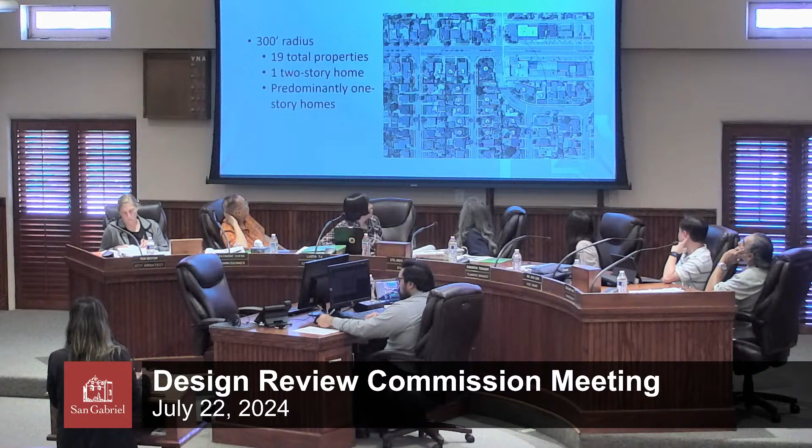The San Gabriel Municipal Code requires a comparison of one-story versus two-story homes within a 300-foot radius of the project site. There are a total of 19 properties within this radius, and there's only one two-story structure in the neighborhood, so the proposed one-story project is deemed compatible with the predominantly one-story streetscape.

The general plan land use designation for the site is low-density residential, which allows for single-family residential use in the R1 zone, so the proposed project would meet housing goal 10.3 of the general plan.

The project was reviewed for compliance with the California Environmental Quality Act, CEQA. The proposed project is exempt per guideline 15303, which is a class 3 exemption for new construction.

The public notice for the project was provided in several ways. One, it was mailed to all property owners and tenants within a 300-foot radius. The notice was posted at the project site, City Hall, the post office, and the public library, and it was also advertised in the San Gabriel Sun newspaper on July 11th, 2024.

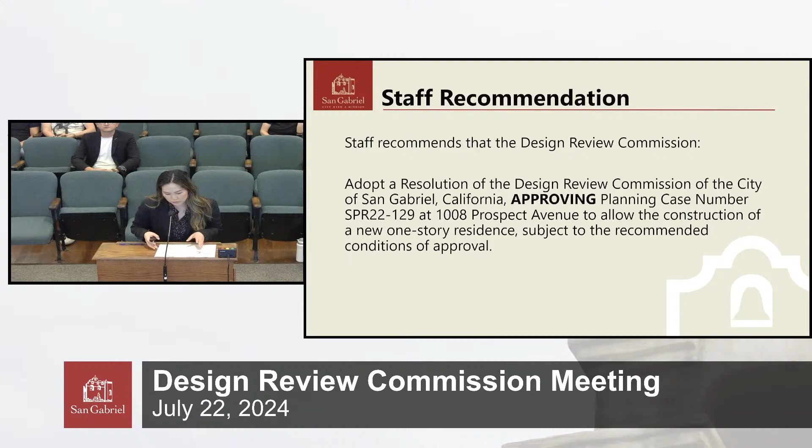Staff recommends that the commission adopt a resolution approving planning case number SPR 22-129 at 1008 Prospect Avenue to allow the construction of a new one-story residence, subject to the recommended conditions of approval. That concludes staff's presentation, and I'm available for questions.

Thank you. We'll go down the list here. Commissioner Tsang, do you have any questions for staff? No, I do not. Commissioner Tu? No, I don't have questions for staff. Thank you. Commissioner Lopez? Not at this moment, thank you. Vice Chair Salo? No questions for staff.

I do have one question. This property has two fronts, one on Prospect, which the address is on, and the other is on Circle Drive, which is the rear of the property. In the list of conditions for approval, number 55 calls for the planting of one tree. Parkway Landscaping says one tree to be planted on a public street, as per the city's master plan. So would that be the Prospect, or would that be Circle Drive?

I'm sorry, Madam Chair, which condition number is that? Number 55, Parkway Landscaping. That appears to be a condition from the Public Works Department. I believe that would be along Circle Drive, from my understanding. Okay, all right. Because I was looking on their landscape plans, and it wasn't specific on that. Right, it wasn't shown on the landscape plan, it was implemented as a condition of approval, so they'll need to show that on the plan checks that's needed. All right, thank you.

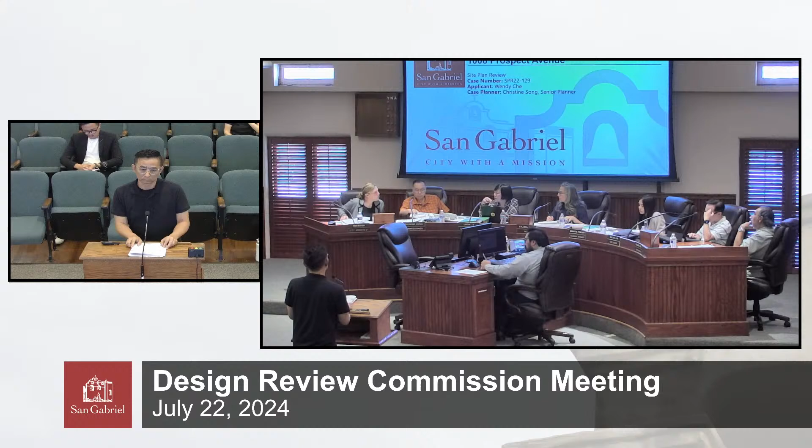Understood. Also, the material board showing the exterior door, that is a charcoal color, but the image showing is like an oak wood color. Is that a typo? I'm sorry, I'm Wendy Che, by the way.

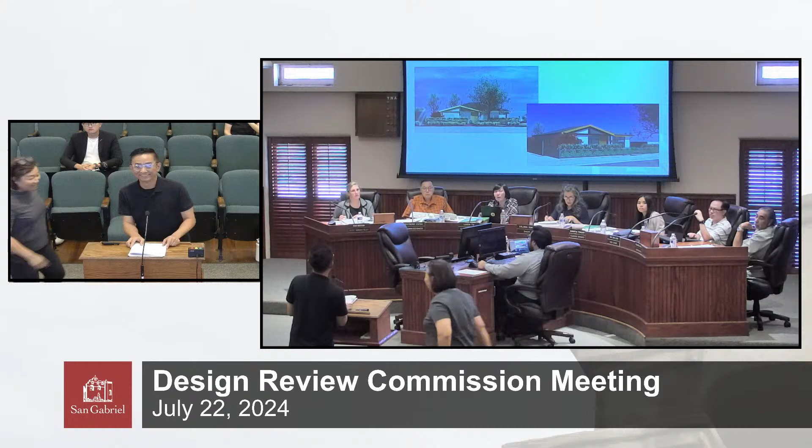Basically, originally we wanted to design with black vinyl, but we weren't sure, so we did it white. But we drove around San Gabriel City, and there's a lot of black windows, so we're proposing to use a black vinyl, manufactured by Milgard. Oh yes, I know that.

I was asking about the exterior door. The door that we indicate, the style of the door - we just downloaded the picture from the website, and it indicates the wood color, but we want to stay with dark charcoal, dark espresso color. Style-wise, everything's very consistent, consisting of a brown color, black window trims, and black window frame. I'm sorry, brown window frame and brown doors. Everything will be in that consistent color.

So it is a charcoal color door, dark gray, charcoal color door, right? Yes. And this one is showing like two doors, right? One side light, one single, paired. One small side light, one 36-inch single door.

Okay, so the elevation is showing the right thing, but the material board is not. The board, I think the color that you see is actually dragged from the computer. We did not change the color because that's something readily available on the computer.

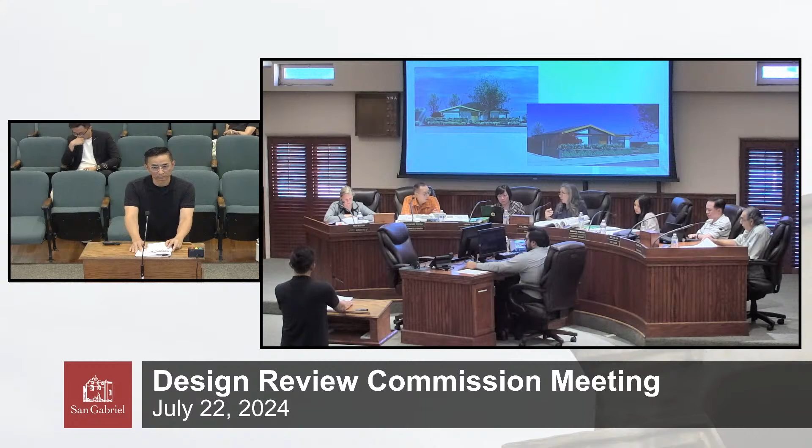They give guidance. I'm going to turn to Julia - she's not our normal contact, she's our substitute today. But this is something that one commissioner has brought up: the applicant said this was the best they could do after working 2 years with the city architect. Is there confidence that the city architect team can fix everything, or is it best just coming back at this time?

So our typical city architect hasn't seen that board, right? They've seen this paper submittal, which appears to be a bit more consistent, minus the vinyl windows which say white rather than black - that probably came late in the game. However, as someone who does design review on lots and lots of plans, if your comfort level as the commission is to see this again and want to see the final product, it's not so much about whether sending it back to the city architect means he can fix it, because he absolutely can. I think it's more about your comfort level in approving something and knowing what you're approving versus being a little confused at how the exterior might end up.

So I'm not one for continuances, no one likes those. But if it is a matter of getting this into a consistent form, because this is what we all see at the end of the day when we drive by this home, and it is going to be very visible, and it does have the front and back, and it really is quite nice looking. It's got some very great design features, and it's progressive, but has definitely some style to it, that I do think the details are vital.

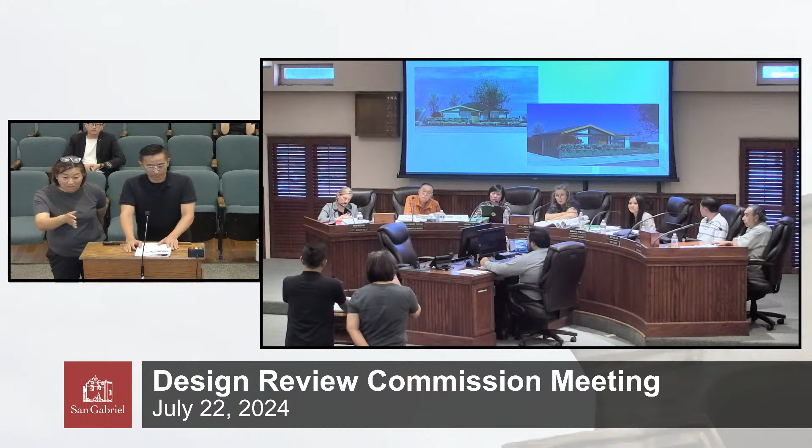So today, believe it or not, I was surprised too, because when they did the design board, I remember we had to use a black window. How did they change to white window? We don't know. We're the first one, so I don't know if it was required by the city or if this had to be done.

So tonight, we thought we were prepared, but of course this is kind of confusing, because the owner gave me a couple of guidelines she wished to keep for the design. But this is a little different than her wish list in the beginning, because we went through numerous changes. So if you give us a guideline, we would like to get back next month, because this house she's building for her 80-year-old mom.

At this point, 2 years went by and this house is not even built. We are still in the public hearing. So at this point, I think we have a pretty clear understanding after today's meeting. We're going to make the design elements, the rendering picture, the design board, everything consistent. So next time when we come back, we will be prepared, and there will be no confusion, because the chocolate was one of the colors, but I don't know if it was allowed or not allowed. So tonight looks kind of confusing.

That's because I'm seeing it for the first time myself, because we were so busy with other projects. The window has to stay black, just like the rendering shows, so it's not according to the design board. After tonight's meeting, we have a pretty clear understanding of what we need to do, and next time when we come back, everything will be consistent.

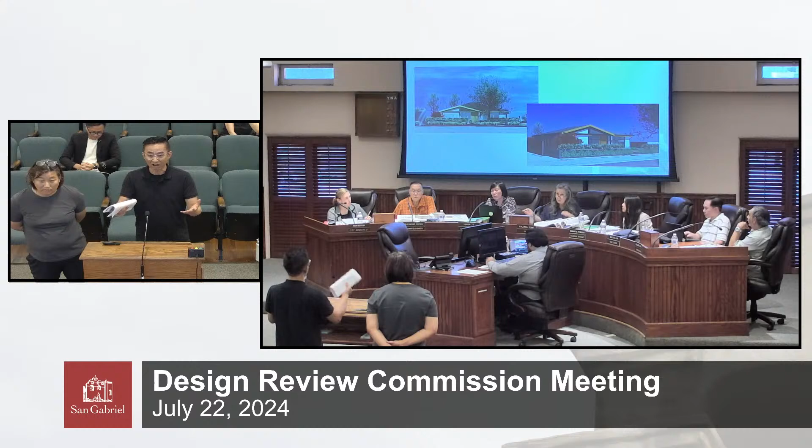So I think there's also the actual material sample here. This fascia board, is that correct? I'm sorry, the fascia board is my confusion. The fascia board and then the beam have to be solid wood. That material is gonna use under the, I don't know what that is. I think it's important that we're not going to tell you how to design your building. I think you really need to talk to the people who are going to be building it, together with your architect, and work all those out, because if they're not consistent on material, size, and color, it will not work at the end.

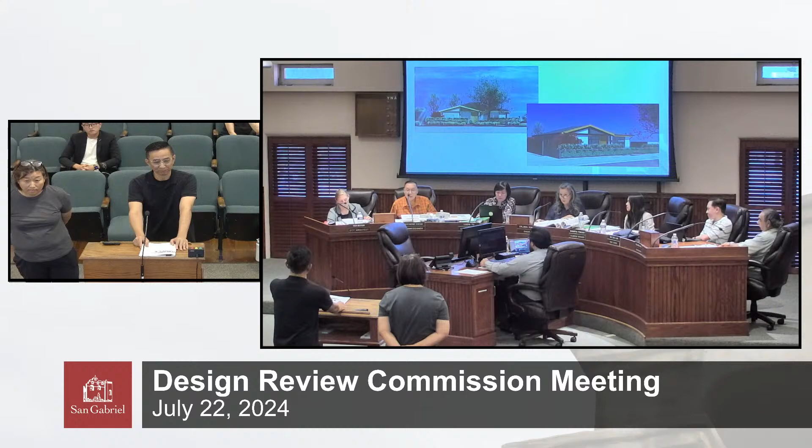Yep, understood. I don't want to repeat what was already said. I think you understand what the inconsistency is, and it makes it almost impossible for us to second guess what you want. Yeah, I got your point, it's not fair to the planning staff.

So I think there's enough discussion on our second motion, if staff would ask for clarification on the motion and the second, the timing of the continuance. That would be date uncertain, wouldn't it? Yeah, the timing of the continuance is open-ended. If the client can somehow come back next month, then that's fine. Date uncertain, so there's no time set, in order to give them the best opportunity to be successful. So it's up to you - you can do it sooner or you can take your time. But if you want to get this thing quickly, get with the city architect quickly, work everything out, and I think we may be able to see it next month.

Okay, thank you. Okay, we do need a roll call on the motion.

Commissioner Chang, yes. Commissioner Tu, yes. Chair Romo, yes. Vice Chair Say Lo, yes. Commissioner Lopez, yes. Okay, motion passes, 5 ayes. Continued, date uncertain.

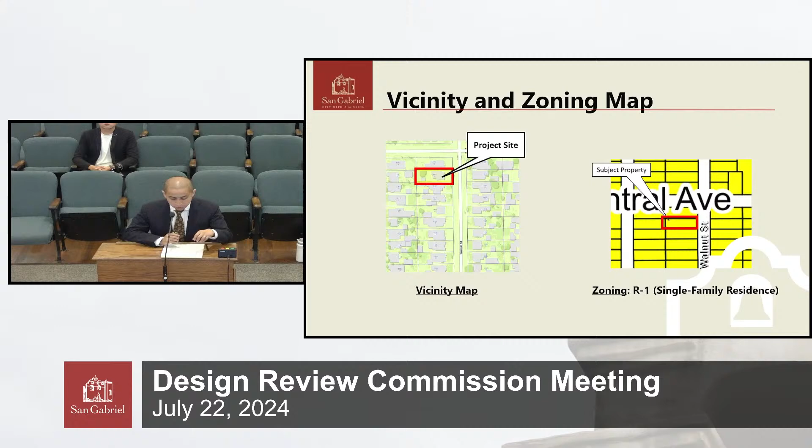The property measures 7,557 square feet and is currently developed with a 1,494 square foot single-family, single-story home. The property is located on the west side of Walnut Street between East Central Avenue to the north and East Chestnut Avenue to the south. The property is zoned R1 for single-family residences and has single-family homes directly to the north, south, west, and east.

The project before you tonight is for a new two-story single-family home and a 658 square foot detached garage and workshop area. The single-family home will measure a total of 2,617 square feet with an 1,805 square foot ground floor and 812 square foot second floor. The proposed home is consistent with the development standards set forth in the municipal code for the R1 zone, including building height, second-story setbacks, lot coverage, and floor area ratio.

The architectural design of the home was reviewed by city staff and the city architect for consistency with the design guidelines for single-family residences. The proposed home is designed in a contemporary style and will be clad in a variety of materials, including white Omega stucco in a smooth finish, horizontal James Hardie siding in a pearl gray color, and an Eldorado Stone veneer.

The project proposes to install new landscaping on the project site. The front yard will include a new lawn and a new garden featuring a variety of shrubs, including coast rosemary, bay laurel, coral aloe, and Munstead lavender, and a new citrus tree and loquat tree. The front yard driveway will be composed of permeable pavers lined by a 12-inch concrete band.

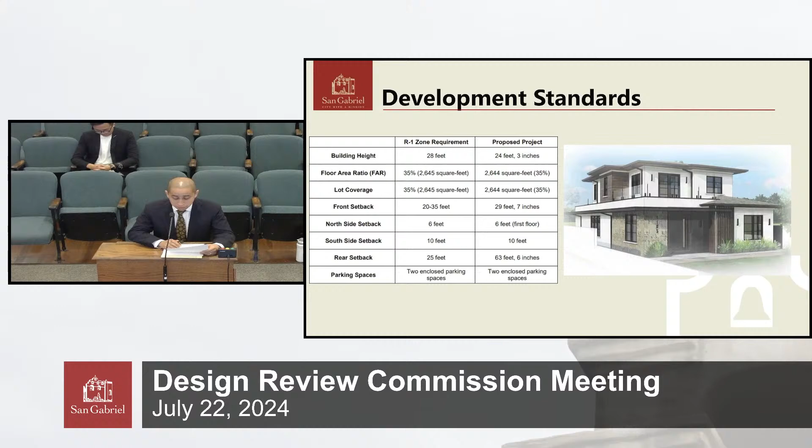The area in the rear yard between the home and the detached garage will also feature a new garden with gardenia, sage, and four 15-gallon fern pine trees. The rear yard will also include an open patio area with an outdoor barbecue, a lawn, and a row of 5-gallon bay laurel shrubs and an additional citrus tree to replace an existing avocado tree.

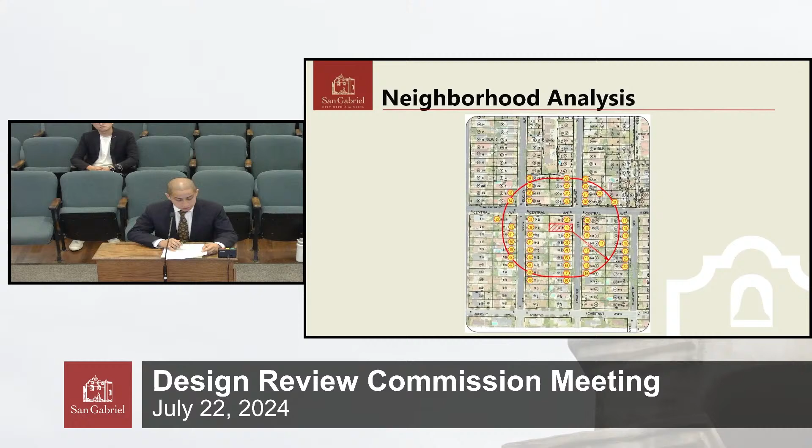Section 153.353 of the San Gabriel Municipal Code requires the submittal of a neighborhood analysis of homes within a 300-foot radius around the project site. The analysis shall identify 1- and 2-story homes in the neighborhood. The neighborhood analysis identifies 12 properties with two-story single-family residences within a 300-foot radius.

The project was also reviewed for consistency with the general plan. The general plan land use designation for the subject property is low-density residential, defined as primarily single-family homes on a single parcel. The proposed project is for construction of a new 2-story home and is consistent with the general plan land use designation. The project also meets Community Design Goal 10.3, to create designs that live and breathe with the City of San Gabriel's neighborhoods as they themselves live and breathe.

The project was reviewed for compliance with the California Environmental Quality Act and was determined to be exempt from guidelines, Section 15303, Class 3, for new construction.

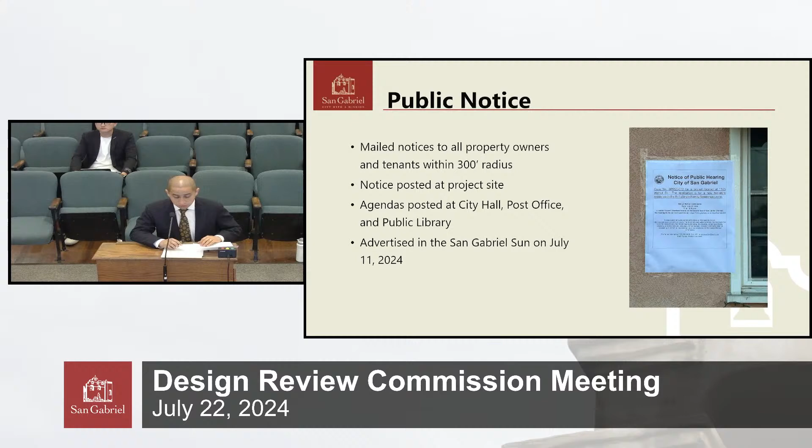On July 11th, 2024, a notice regarding the project was sent to properties within a 300-foot radius of the project site. A notice was also posted on the project site, and tonight's meeting agenda was posted at City Hall, the Post Office, and the Public Library, as well as advertised in the July 11th, 2024 edition of the San Gabriel Sun. With that, staff recommends that the Design Review Commission adopt a resolution approving planning case number SPR 23-012 for a new 2-story single-family residence at 1105 Walnut Street, subject to the recommended conditions of approval. That concludes my presentation.

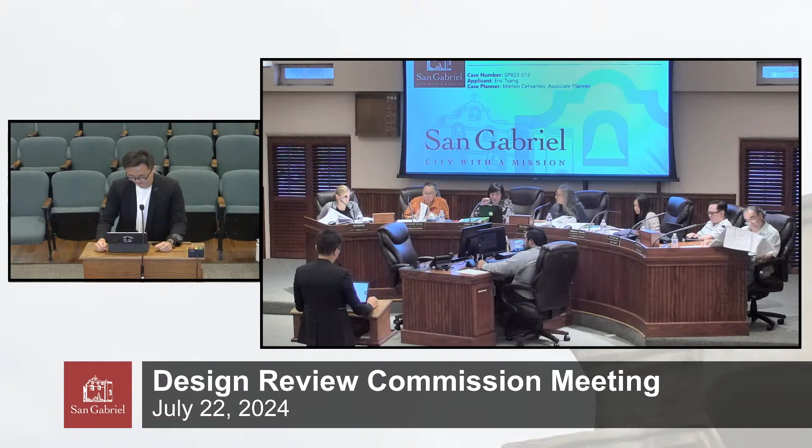No, I don't have other questions. I think the design is really well presented, and everything's, except for one thing that wasn't consistent, the wood slat. But the applicant already clarified that. Thank you.

Commissioner Tsang? Along the same line, what is the size of the horizontal siding? The horizontal siding is called out to be a V-groove by James Hardie, and it only comes in one size, 8.25 inches. That's the width of each piece, each row. And the width of each panel is 12 feet, matched correctly. Okay, 8.25, that's fine. All right, thank you. That's all I have, I just wanted to make sure it's identified correctly.

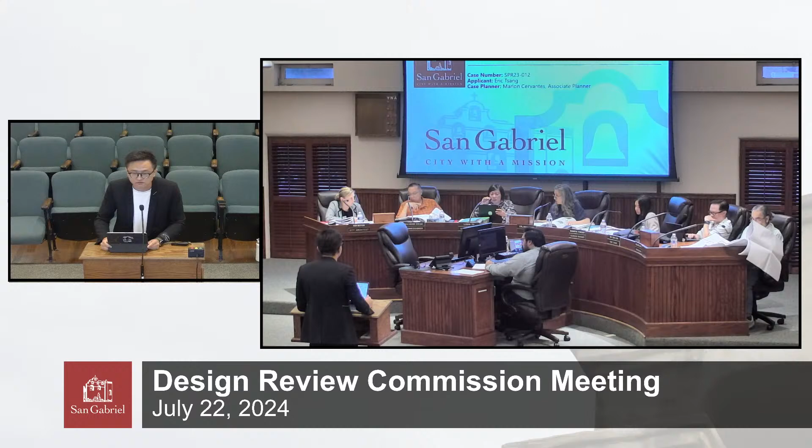Yes, I do have one more question. Speaking of the door, I noticed there is a canopy around the building with a 5-foot cantilever. It appears to be a metal material, but it was not articulated on the section, so I was wondering how this detail works. I provided a detail for that on sheet A5.0. It's a metal awning, part of the modern design element we provided for this house, basically an overhang providing shading or weather protection around the first floor, especially for the front door.

So it's a metal awning attached to studs? Yes, that's correct.

So how is the drainage being dealt with? There is going to be a slope towards the front of the awning, and we can have the water going downward. So is the entire awning prefabricated? You can get it prefabricated if it comes in the right size, as I called out on the plan, but it can also be custom built by metal subcontractors if needed. Okay, all right, thank you.

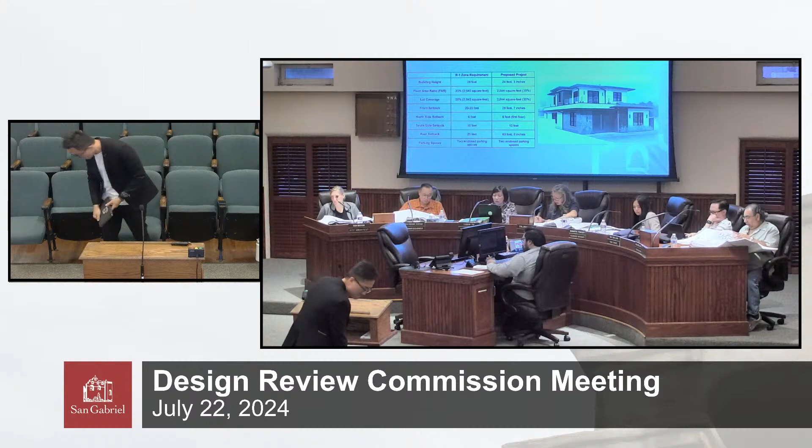It is now 8:10, and the time for public comment on this item is now. Do we have any public comment on this? No public comment at this time, Madam Chair. Thank you, public comment on this item is now closed.

So it's now our turn as a commission to deliberate and discuss this item. I'll start with Commissioner Tu. I think we generally appreciate the design, and I'm ready to approve the project. Thank you.

Commissioner Tsang. Thank you, Chair. I think all the details are consistent, it's a well-designed set of plans, and the building at the end is going to be very attractive, so I can approve it.

Commissioner Lopez. Thank you, I think it's a nice project, it looks really nice. I just want to make sure that the frame or metal structures holding the glass are in fact painted black. In your rendering on page A6.0, they look stainless steel. As our fellow Commissioner Tu noted, it would look kind of weird if they remain stainless steel. That's what it looks like, but I just want to make sure it does in fact get painted black.

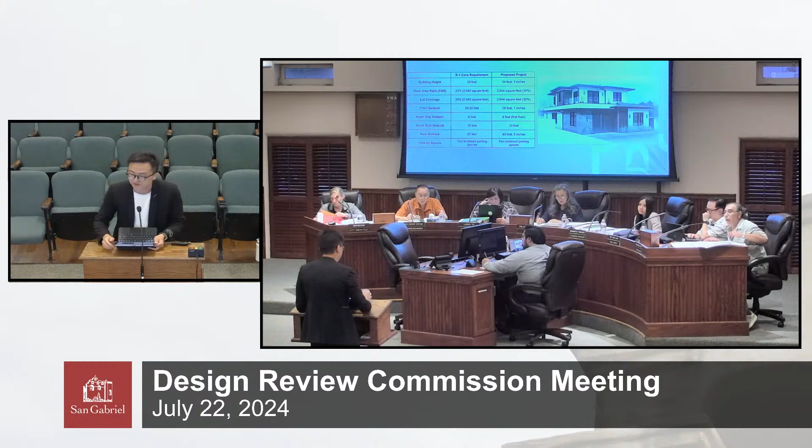Yes, and if you look at the rendering, it shows it black. I agree, but on page 6 it shows differently. Yeah, the material is just the stock picture from the manufacturer. Okay, thank you, thank you.

Vice Chair Sela. Yeah, I have nothing more to add, so I'm ready to move forward. Okay, I'm going to ask my architect colleagues here about whether there's a concern regarding the pivot door before we look to move this project forward.

No, I don't see an issue with it, especially if you have experience, so you can make sure the contractors building it do it correctly. It is under an overhang, so it is somewhat weather protected, and I think that's important. So at this point, no, we don't have any issue with it. Great, thank you very much.

And at this time, if someone would like to entertain a motion. I'll give it a try. I'd like to move to approve planning case number SPR 23-012, site plan review at 1105 Walnut Street, all in accordance with the city's recommendation and conditions of approval.

Thank you, is there a second? Yeah, I second the motion. Roll call, please. Commissioner Tsang, yes. Commissioner Tu, yes. Chair Romo, yes. Vice Chair Selo, yes. Commissioner Lopez, yes. Five ayes, motion passes.

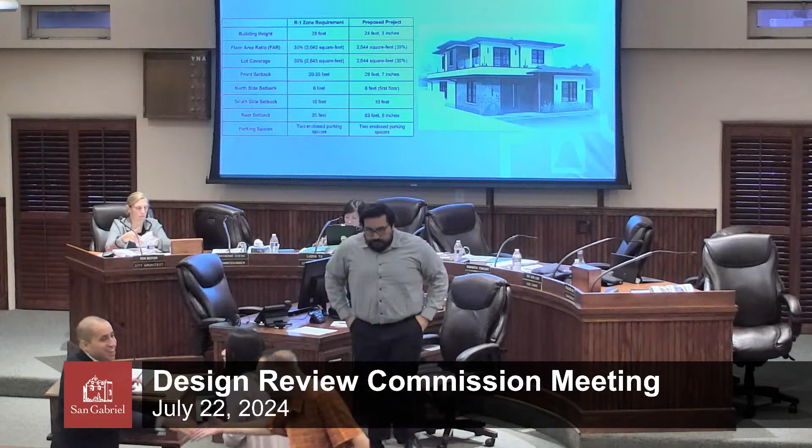Yeah, I need to stretch. Yeah, well, fortunately.

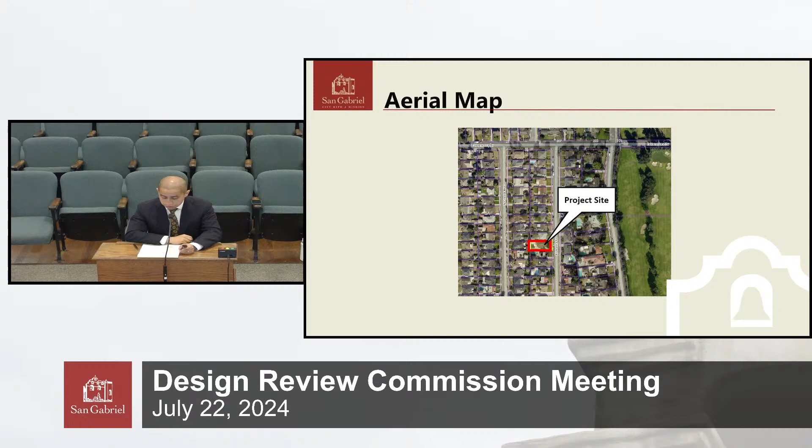The third item before you tonight is a public hearing item for a site plan review to allow for the construction of a new two-story single-family home located at 143 Alabama Street, planning case number SPR 22-098. The property measures 6,000 square feet and is currently developed with a 1,588 square foot single-story single-family home. The property is located on the west side of Alabama Street between East Hermosa Drive and East Las Tunas Drive. The project site is zoned R1CC, Single Family Residence Country Club, and has single-family homes directly to the north, south, west, and east.

The R1CC zone was established by ordinance number 487, included as attachment B to your staff reports, in 1998 to protect large lots surrounding the San Gabriel Country Club from being subdivided into smaller parcels in order to preserve the unique character and inherent qualities in the neighborhood. Prior to the zone change, the country club and surrounding residential properties were zoned R1.

The adoption of the R1CC zone established a new minimum lot width and site area of 100 feet and 14,520 square feet respectively. The ordinance did not establish any additional development standards, so for the purposes of this proposal, the project was reviewed for conformance with the development standards within the R1 zone.

The project before you tonight is for a new two-story single-family home and a 481 square foot attached garage. The single-family home will measure a total of 2,068 square feet with a 1,225 square foot ground floor and 843 square foot second floor. The proposed home is consistent with the development standards set forth in the municipal code for the R1 zone, including building height, second-story setbacks, lot coverage, and floor area ratio.

The architectural design of the home was reviewed by city staff and the city architect for consistency with the design guidelines for single-family residences. The proposed home is designed in a contemporary style with elements of a minimal traditional home. The home will feature white La Habra stucco with a smooth finish, contrasting bronze windows, a Tesla solar roof, and stone veneer.

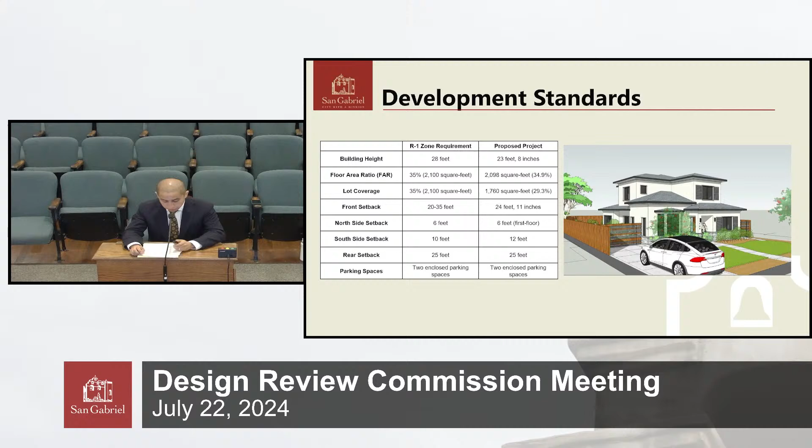The project proposes to install new landscaping on the project site. The front yard will include a new lawn and a new garden featuring a variety of shrubs, including coast rosemary, blue fescue, lavender, and dwarf olive bushes, as well as new fruitless olive trees and a chaste tree. The applicant also proposes to plant 33 15-gallon fern pine trees along the shared property lines on the north and south sides of the property and along the rear yard property line as well. The rear yard will also feature a new lawn and garden with additional ground cover materials, shrubs, a Grace smoke tree, and a second fruitless olive tree to replace a Chinese elm tree that will be removed.

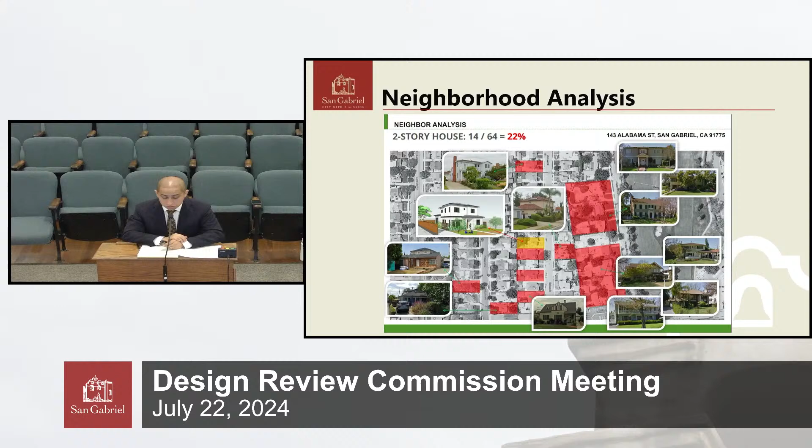Section 153.353 of the San Gabriel Municipal Code requires the submittal of a neighborhood analysis of homes within a 300-foot radius around the project site. The analysis shall identify homes in the neighborhood and shall identify two-story homes in the neighborhood. The neighborhood analysis identifies a total of 14 properties with two-story single-family residences within a 300-foot radius.

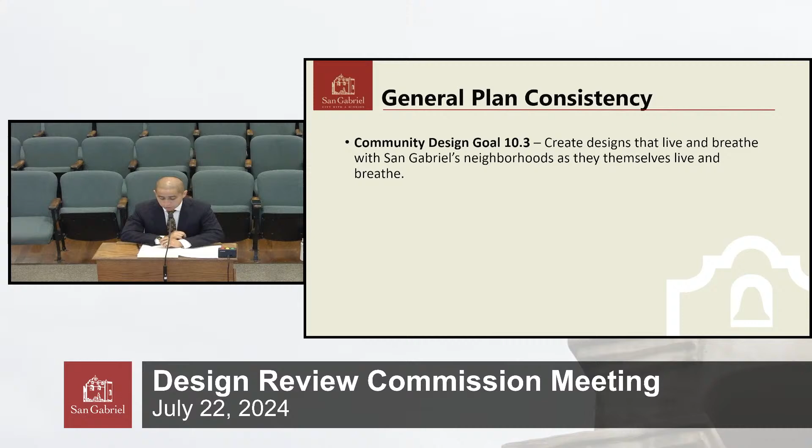The project was also reviewed for consistency with the general plan. The general plan land use designation for the subject property is low-density residential, which is defined as primarily single-family homes on a single parcel. The proposed project is for the construction of a new two-story home and is consistent with the general plan land use designation. The project also meets community design goal 10.3 to create designs that live and breathe with San Gabriel's neighborhoods as they themselves live and breathe.

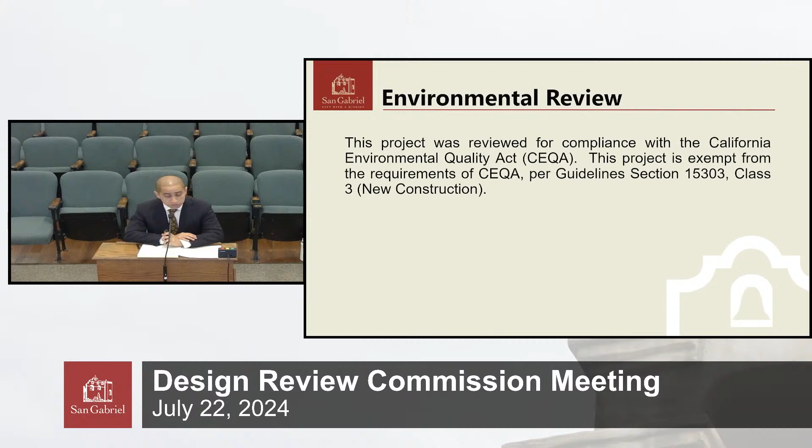The project was reviewed for compliance with the California Environmental Quality Act and was determined to be exempt per guidelines section 15303, class 3 for new construction.

On July 11th, 2024, a notice regarding the project was sent to the properties within a 300-foot radius of the project site. A notice was also posted on the project site. Tonight's meeting agenda was posted at City Hall, the post office, and the public library, as well as being advertised in the July 11th, 2024 edition of the San Gabriel Sun.

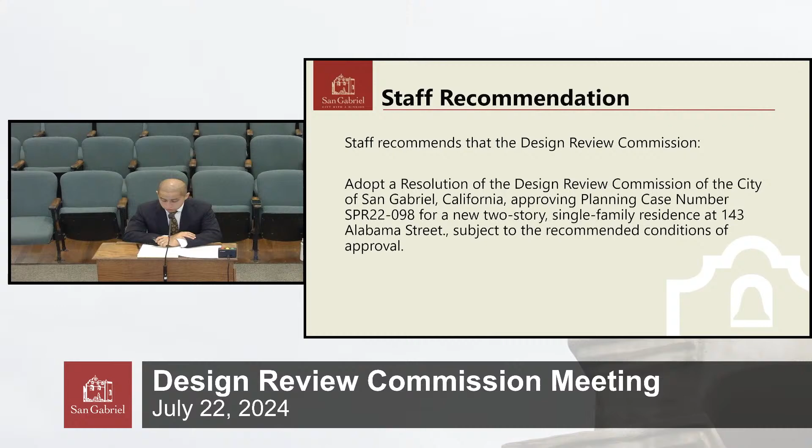With that, staff recommends that the Design Review Commission adopt a resolution of the City of San Gabriel approving planning case number SPR 22-098 for a new two-story single-family residence at 143 Alabama Street, subject to the recommended conditions of approval. That concludes staff's presentation.

Commissioner Lopez? No questions, thank you. Vice Chair Salo? Yeah, I do have one question.

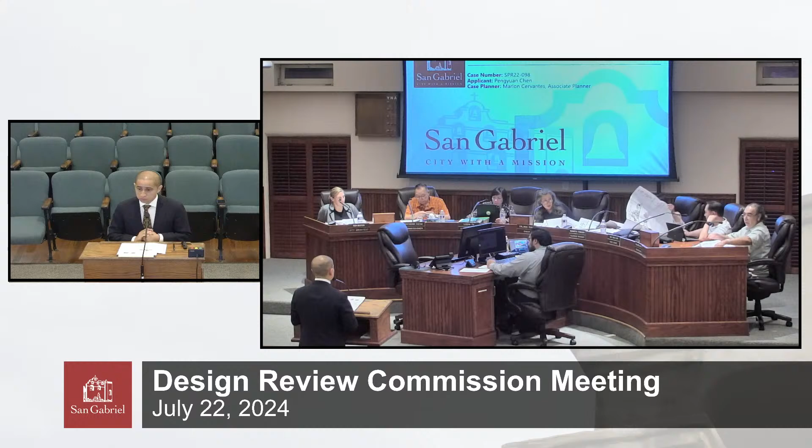Can you help me understand the R1CC single-family residence zone? I heard you say 100-foot lot width and 14,000 square foot area, but this lot appears pretty standard. When that was adopted in 1998, it established minimum lot width and minimum lot size requirements. There are some larger lots within this zone, and the ordinance was adopted to prevent those larger lots from being subdivided. Existing lots were not necessarily determined to be unbuildable; they can be developed subject to the R1 development standards, as the R1CC zone did not establish any further development standards beyond the minimum lot size or lot width. So that really only applies to new lots, those minimum dimensions.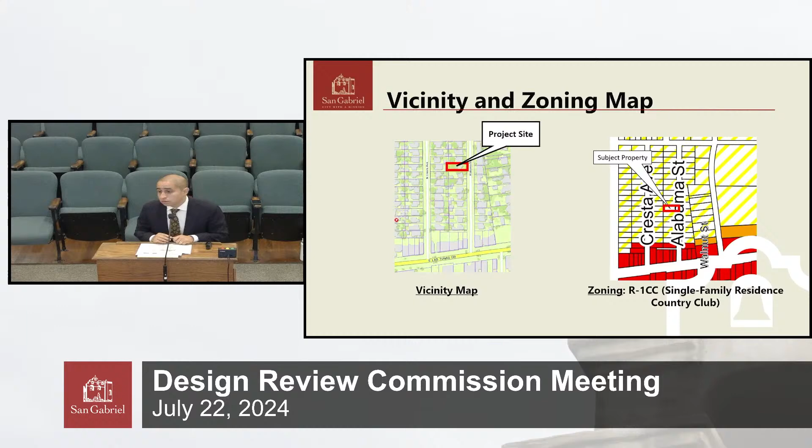Okay, and before you finish, could you leave it on the site plan or front elevation? So there's the site plan. Okay, thank you very much.

No questions. Is the applicant here? He is, yes. Come up, please.

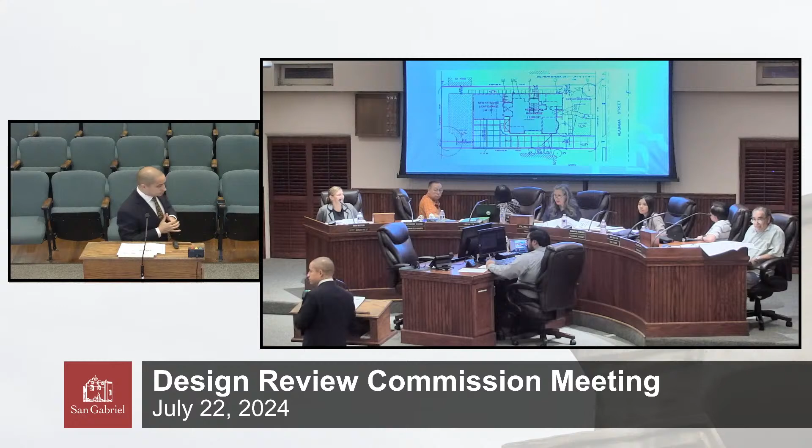Thanks for Marlon's presentation. I'm Perry, the architect for this project located at 143 Alabama Street, San Gabriel. My client Mr. Lam has lived in this location more than 12 years, and he has 2 school-age kids. After they grew up, they needed more livable area, so we propose to build a 2-story single-family house for this location. My client is really concerned about the neighborhood and wants to improve the streetscape, so we provide a nice front yard landscape to make it nicer. We worked closely with the city architect, and we really appreciate Ron giving us a lot of valuable comments to make the design better. Feel free to ask me if you have any questions. Thank you very much.

Commissioner Tu? Yes, I have a couple questions.

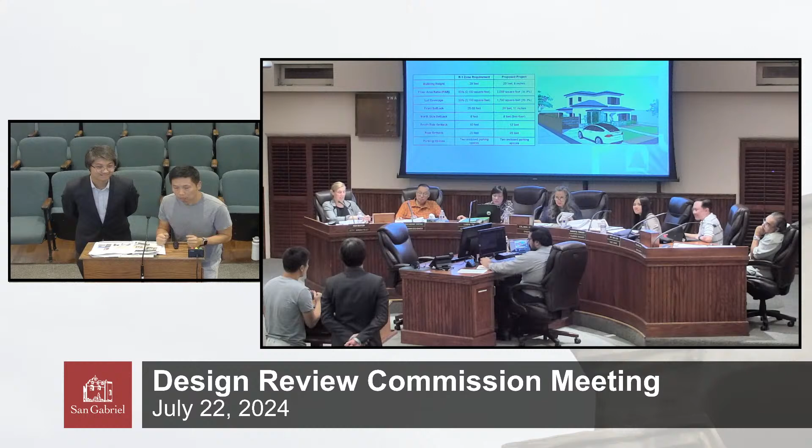Yeah, so just to add on, I have already started the process to submit the blueprint to Tesla. I'm not confident, but I'm trying. So I have it going, hopefully by the time everything's in place, that's when I put in my deposit, because the deposit is non-refundable.

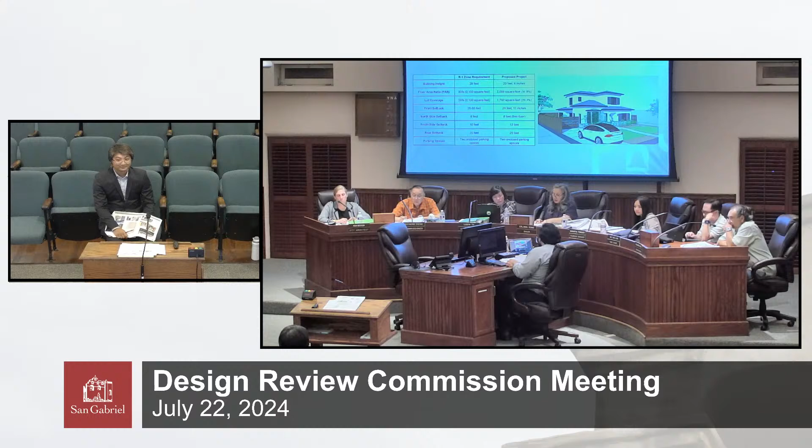So at this time it is now 8:41. Any public comments? We can open the public comment time. There was public comment, Madam Chair. Okay, it is now 8:41, and the time for public comment. Madam Chair, there's a public comment. Oh, there is one?

Okay, sorry. So the public comment comes from Cheyenne. She is a resident on Alabama Street. She would like to voice that she does not support the project. Her comment is: I do not support the proposal of a two-story residence on my street, as the project would be under construction for an extended period of time, and as a resident across the street, noise and dust would be an issue. That's the end of the comment.

Thank you. Was there a last name and an address? No last name or address provided.

Okay, and just to clarify with staff, there are dust and noise mitigation, is that correct, with any type of construction? That's correct. There's conditions for dust control as well as the city's noise ordinance and construction hours from 7 a.m. to 7 p.m. Monday through Friday and 8 a.m. to 4 p.m. on Saturdays. No construction on Sundays.

So I think since it's very difficult for you to talk to this one neighbor, you can at least talk to maybe a few neighbors around you and let them know that there will be some mitigation going on and information regarding the hours. Yeah, I think I approached most of the neighbors that I know, and so far I don't have any feedback, so I don't know about this particular one.

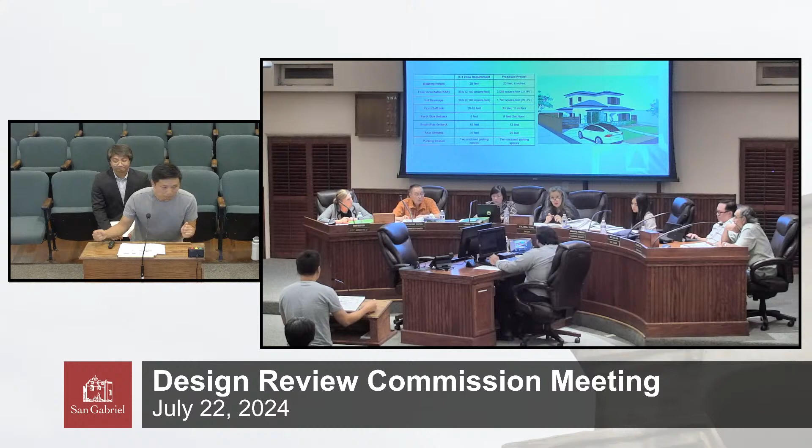So do we have any other comments, Dominic? No other public comment. Okay, so it is now 8:43, and the time for public comment is now closed. Now it's our turn to deliberate and discuss this item.

Commissioner Tu? Yes, I think I'm ready to approve the project. Thank you.

Commissioner Tsang? I concur, with the exception that the architect should seriously consider reducing that 6-inch sill overhanging under the window sill. So I would approve it with the understanding that they reduce the size to the point that it is at least structurally safe and also for the children. That would be reviewed with the city architect before it's finalized. That's fine, I think they just want to make sure that it's reduced to the point it's safe to put in. Yes, thank you.

Commissioner Lopez? No comment other than I like the rendering. I like how it looks, and it seems like everything kind of checks in. I would have liked to see how the Tesla roof would have looked in the rendering, because you see different roofs, different composites, like, oh God, what happened there? But I like the project. No other comments, I'm ready to move on.

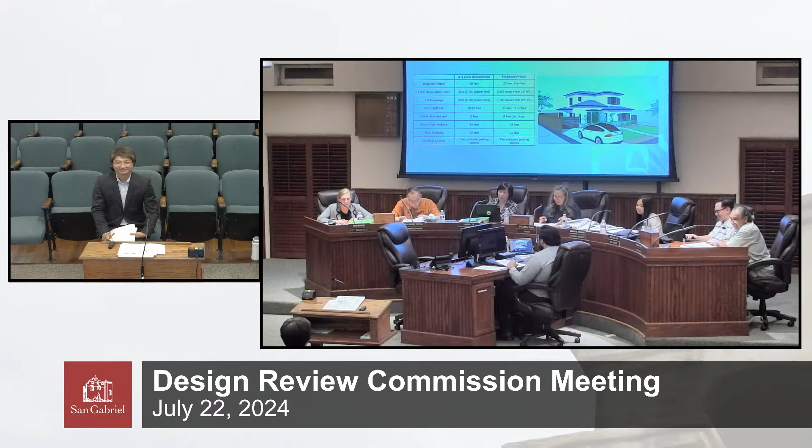Vice Chair Sela? No additional comments, thank you. And I think probably there's no template for the Tesla roof on the computer that you can cut and paste yet. That's very possible, yeah, soon that'll be there. So do we have a motion?

I'll give it a try. I move to approve planning case number SPR 22-098, site plan review on 143 Alabama Street, with a condition that the designer is to modify the window sill detail with the city architect so that it will be structurally safe and sound.

Thank you. Is there a second? Yes, I second. Roll call, please. Commissioner Tsang, yes. Commissioner Tu, yes. Chair Romo, yes. Vice Chair Salo, yes. Commissioner Lopez, yes. 5 ayes, motion passes.

Now move to item 4, comments from the planning manager. No comments from staff.

Item 5, commissioner comments and conference meeting reports. Each commissioner may address the commission and the public on matters of general information and/or concern. This is also the time for commissioners to report on conferences or meetings they have attended. Commissioner Tu?